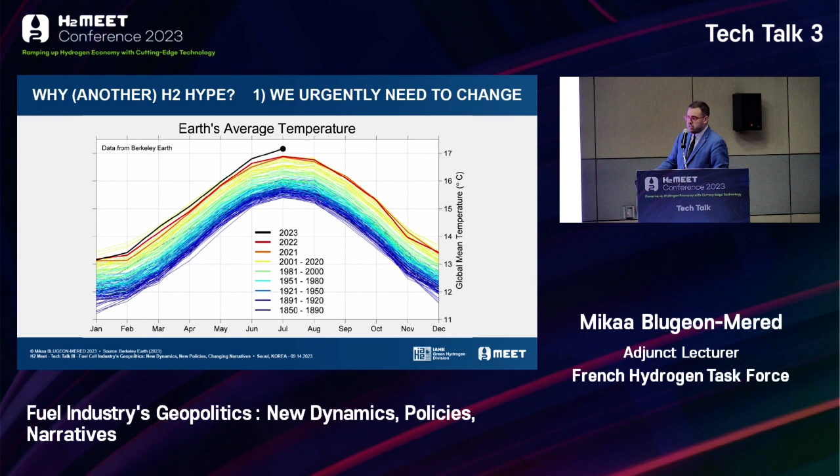To get there, the window is basically shrinking. And when I say the window is shrinking, that should push policy makers and the other people I mentioned to invest even more in hydrogen, fuel cells, and so on.

But of course, it's more complicated than that. First of all, the numbers are so huge that some people will see this as a massive historical business opportunity, while others will experience a disconnect between the reality and those numbers. The sheer size of those numbers creates a sense of defeat before even trying to understand them better - it's too hard, too complicated, the mountain is too high, we'll never get there.

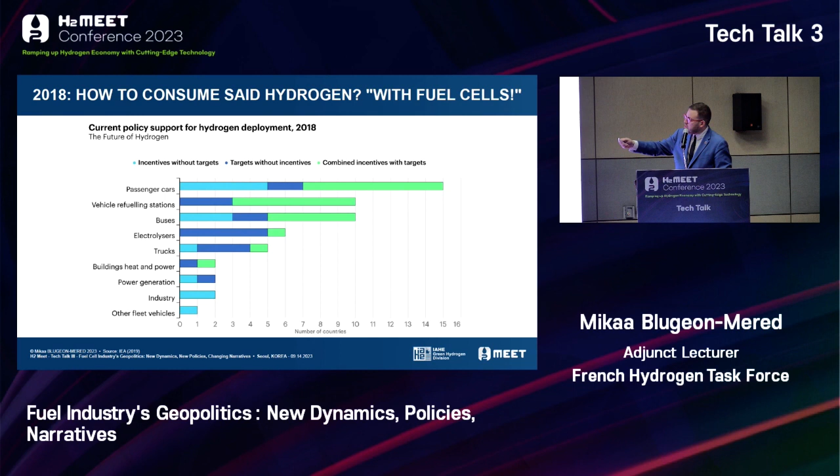Let's focus all our efforts on passenger cars, refueling stations, and buses with fuel cells. Because in the general media, with politicians and administrations, fuel cells seemed easy, right? You just take some hydrogen, take some oxygen, mix the two together, and boom — you get water and electricity, and voila, magic. Of course, you don't have to go further to develop a powerful message for the general public. It doesn't have to be deeper than that.

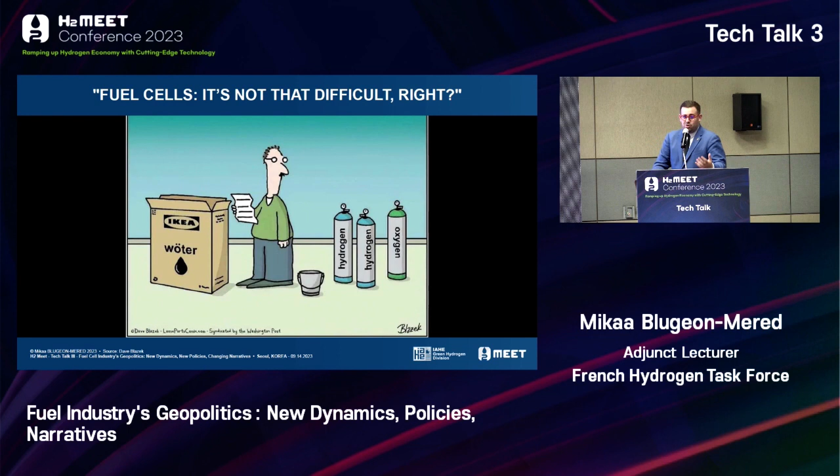Only, well, it's not that easy. And I'm sure in this room we have many engineers and scientists who know it's not that easy. That is precisely the reason why it was a weird choice — we explain it now in hindsight, right? But at the time, people thought it was good.

People thought hydrogen cars and taxis would convince people — they'd see it doesn't make noise, that it's drivable, etc. Well today, apart from Korea, China, and Japan, there's really no country in the world where fuel cell electric vehicles have taken off. And even in Korea, China, and Japan, I wouldn't say it's really taken off, to be honest. But voila, that's what we've got here.

We've got strategies in most of these countries focusing on a technology that was thought to be easy, but proved more complicated to implement at the scale believed, and that is actually way too small to kickstart an industry. The demand for hydrogen for transport applications in 2021 was merely 0.03% of global hydrogen demand. So you will never kickstart an industry, and more importantly, not in the context of urgent climate urgency, with that kind of thing.

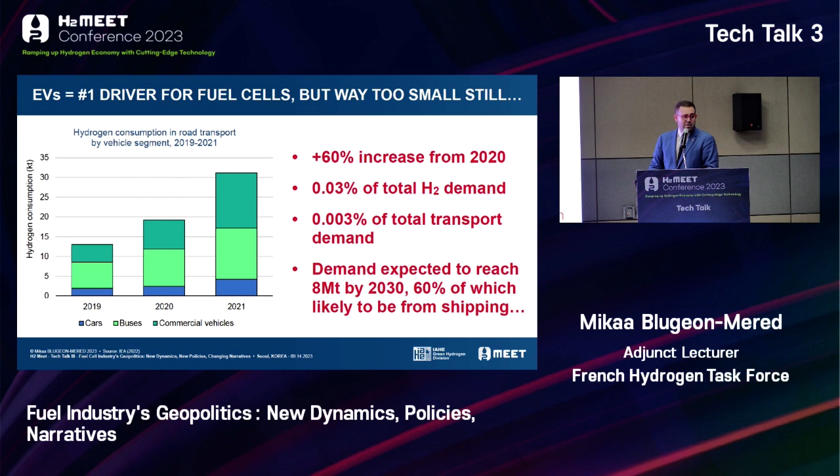But that's the thing, at the end of the day, we're now in 2023, and in hindsight, there was too little distribution infrastructure, too little adoption, too much complications, and so on. Now the narratives around fuel cells are changing even faster. What is happening in fuel cells?

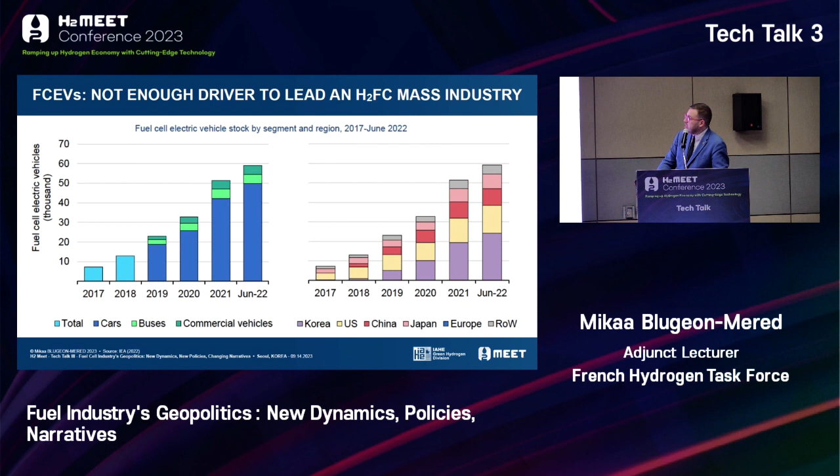Okay, but once again, it's too little. And not only is it too little, but there's one big actor that managed in just a matter of a few years to actually clinch the majority of the market. That huge actor that only the US can certainly compete with is, of course, China.

So if you ask any European car maker, any European car market analyst, they will tell you, well, fuel cells might actually be a bad idea, not just because it's ineffective in getting that hydrogen industry rolling, but because building fuel cells in a car is actually quite close to building an electric battery car.

Who's leading in battery electric vehicles today? China. Can Europeans compete with China on battery electric vehicles? The answer is no. That's why in Europe we're taking the hardest protective measures vis-à-vis our own market, to protect our car makers who cannot compete with China on costs and now even on technology.

So then, from a European point of view, and even from an American one as well, what's the natural play once you realize that you can't compete? Well, you're going to change the game, or at least change the rules of the game. That's where you'll get people saying in Europe, in the US, in Canada, well, we're going to have battery electric vehicles. That's a given. This ship has sailed.

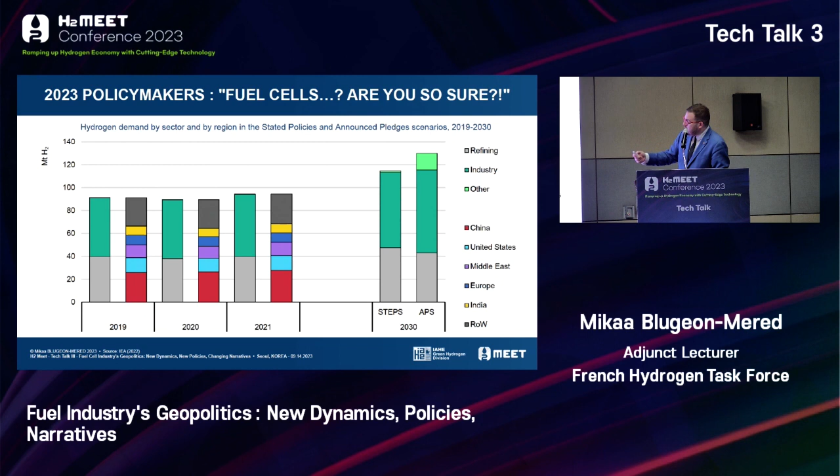And that's how we now have a lot of debate in Europe about the fact that we should ditch fuel cells and actually promote internal combustion engines running on hydrogen. This narrative has changed. The switch happened in the past year and a half, and it happened very fast.

And in Europe, it was even exacerbated when the European Parliament this year, in 2023, decided to ban the sale of thermal cars in 2035. Car makers in Europe were like, okay, so we have green parties coalescing all across Europe, so that in the European Parliament they passed this ban on selling new thermal cars by 2035.

What's the alternative? Batteries, we're screwed. FCEVs, we're about to be screwed. What's left? Oh, ICEs. But ICEs, that's a thermal car. Yeah, it's a thermal car, but it's not running on fossil fuels. So maybe that's fine. Actually, that's the only loophole in the law.

So definitely, this is just an example in the passenger car, lightweight vehicle space. But then, of course, this message saying that fuel cells might not be the way, might be too complicated, might actually be a strategic vulnerability for Europe and the US, has spread to other parts of the hydrogen industry and these industries that could be abated with hydrogen. And when you look at the 5 main types of usage for hydrogen in a Paris Agreement context, what you realize is that actually fuel cells are not needed in most cases.

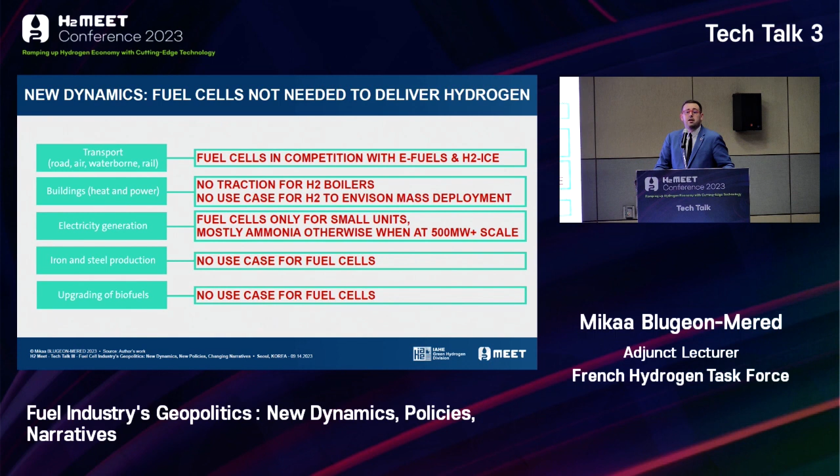So that once again pushes the narrative that we should ditch the fuel cell strategy and focus on co-firing, ammonia, internal combustion engines, and so on. This is purely political, and I would dare say geopolitical. Refineries, fertilizers, steel making - we don't need fuel cells.

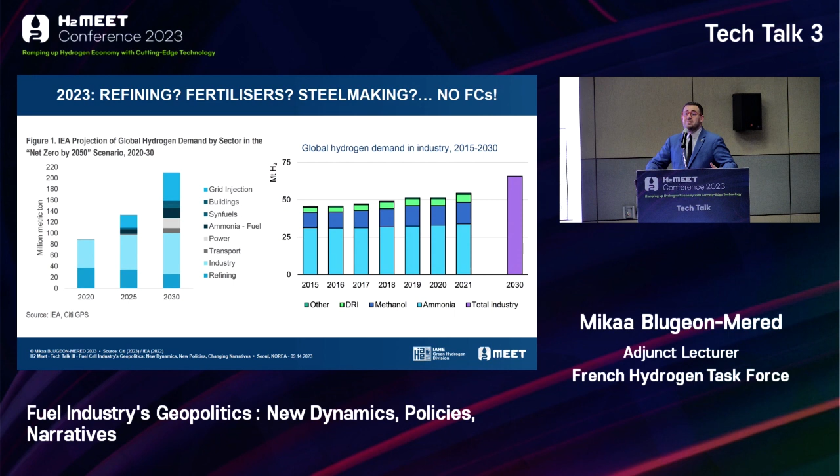So if that's what Sweden is focusing on, the Netherlands is focusing on, Germany is focusing on, France, Spain, etc., then basically fuel cells, okay, they're there, but we're not going to use them that much. So we can't build our new 2023, 2024, 2025 updated hydrogen strategies on fuel cells. We can't do that anymore.

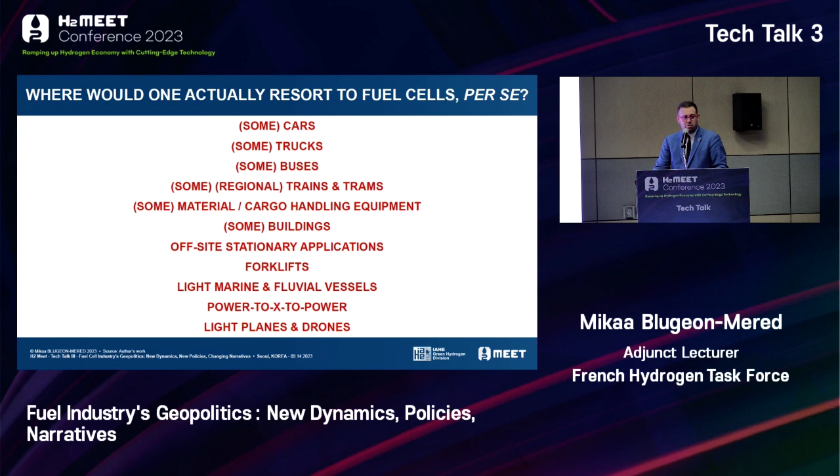But now, my main message and my main question for you guys, everyone here in this room, ladies and gentlemen, is when you think about hydrogen, and when you think about the change that we need to deliver by 2050, which is in less than 10,000 days, should we have a global effort at the macro level on what matters the most? Or should we just think about business? Thank you so much for listening to me.

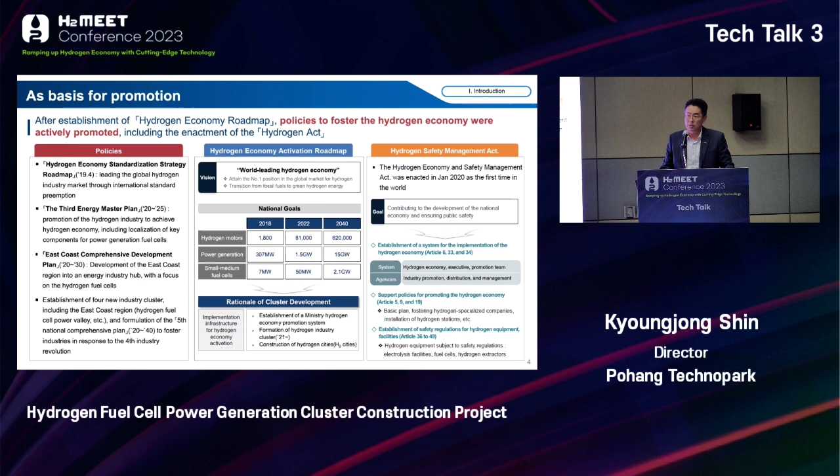2040년까지 수소차 620만 대 보급, 발전용 연료전지 15기가와트, 가정 건물용 2.1기가와트 보급이라는 아주 적극적인 목표를 가지고 현재 추진 중에 있습니다. 그리고 이런 정책을 뒷받침하고자 수소경제 이행을 효과적이고 지속적으로 추진하기 위해 2020년에는 세계 최초로 수소경제 육성 및 수소 안전 관리에 관한 법률, 즉 우리가 쉽게 말씀드리는 수소법이 제정이 되었습니다.

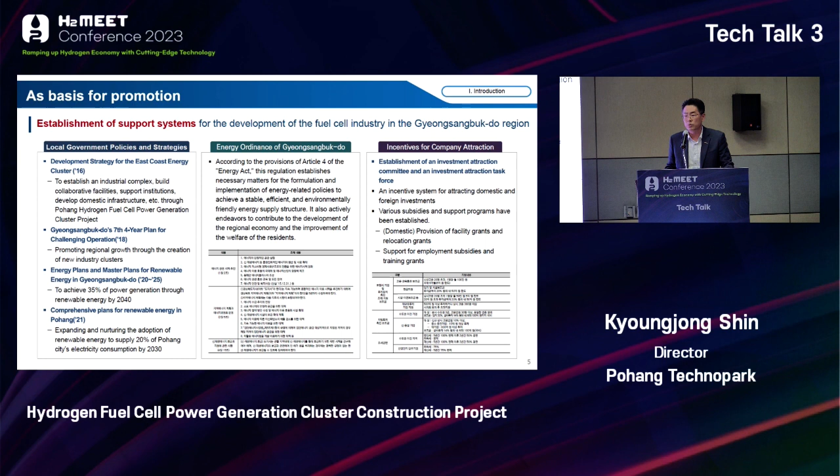여기에 발맞춰서 지방 정부들도 여러 가지 정책과 조례를 지금 제정하고 있습니다. 특히 경상북도와 포항시에서는 동해안 에너지 클러스터 조성 실천 전략 수립, 지역 에너지 계획 및 신재생 에너지 마스터 플랜 계획 수립, 포항시 신재생 에너지 종합 계획 수립 등 여러 가지 정책을 지금 수립하고 있습니다. 경상북도와 포항시에는 지방 조례를 제정해서 수소 사업을 추진하는 데 있어서 최대한 지원을 하고 있으며 수소 관련 기업들에게 인센티브를 제공할 수 있는 여러 가지 조례도 현재 만들고 있습니다.

다음은 클러스터 사업의 추진 배경에 대해 말씀드리도록 하겠습니다. 연료전지 산업은 원료와 소재, 부품에서 최종 발전 시스템까지 다단계 밸류체인으로 구성된 기술 집약적인 산업입니다. 이런 연료전지 산업에 있어서 우리나라는 기술은 세계 최고의 수준으로 자부하고 있지만 산업화 기반 시설이 부족해서 연료전지 산업 생태계 육성이 아직 저조한 수준입니다.

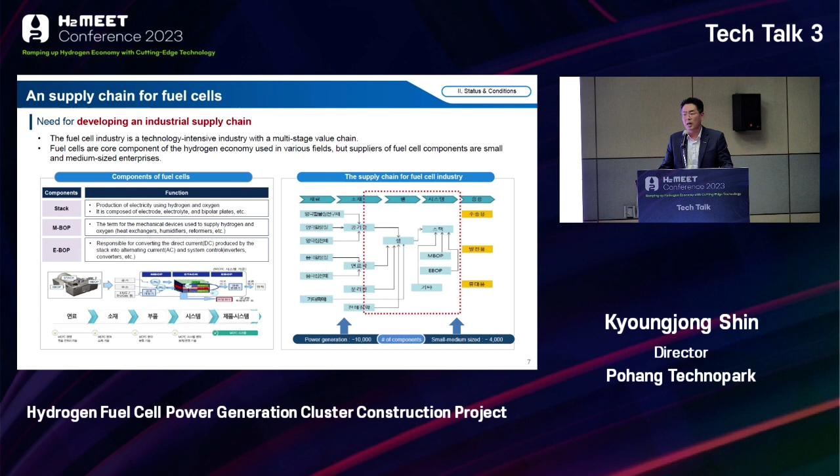우리나라 연료전지 산업은 발전용과 수송용을 중심으로 현재 많이 상용화가 되어 있습니다. 발전용의 경우는 REC 지원으로 인해서 소폭으로 현재 증가세를 이루고 있습니다. 하지만 내부적으로 자세히 들여다보면 스택이나 개질기 같은 핵심 부품들은 아직까지 해외 기술 의존도가 상당히 높은 수준입니다. 그래서 이런 기술의 한계를 극복하고 여러 가지 기술의 국산화를 앞당기기 위해서 저희 사업이 추진되게 되었습니다.

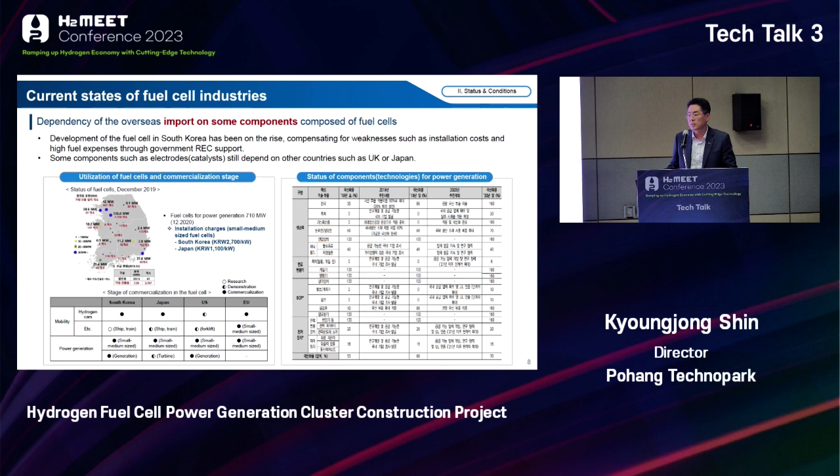그렇다면 왜 이 사업이 포항에서 최적지로 평가를 받아서 추진하게 되었는지 설명드리겠습니다. 포항은 이미 10여 년 전부터 연료전지 테스트베드 구축 사업을 통해서 우리나라 연료전지 산업을 실제로 이끌어 왔습니다. 경상북도에는 연료전지 관련 기업이 약 105개가 위치하고 있고 그 중 55개가 포항시에 현재 위치하고 있습니다. 그리고 저희 테크노파크에 있는 수소연료전지 인증센터와 리스트에는 수소연료전지 관련 장비가 100종 이상이 이미 구축 완료되어 있습니다.

그리고 저희 지역에는 포스텍, 리스트, 포항 테크노파크, 포미아 등 여러 대학과 연구기관에 수소연료전지 관련 연구원 인력이 700명 이상이 현재도 연구를 진행하고 있습니다. 포항시에 지곡밸리라는 곳이 있는데 이곳에는 포스텍과 리스트, 가속기 연구소, IBS, 포미아, 막스플랑크 연구소 등 국내외 연구기관이 집적화되어 있습니다. 그리고 세계 최고 기업인 포스코가 위치하고 있어 수소연료전지 산업 시너지 효과가 상당히 높을 것이라고 평가받고 있습니다.

그러면 수소연료전지 발전 클러스터 사업에 대해서 간단히 설명드리겠습니다. 클러스터는 총 3가지 코어를 중심으로 추진할 계획입니다. 연료전지 관련 기업과 기관이 위치해서 산업 생태계를 구축하는 기업 집적화 코어, 연료전지 핵심 부품과 시스템을 평가하는 장비 20종 26기를 구축하는 부품 소재 성능 평가 코어, 그리고 여기에서 개발된 기술과 제품을 실증할 수 있는 국산화 시범 코어, 이렇게 3가지 코어를 중심으로 추진할 예정입니다.

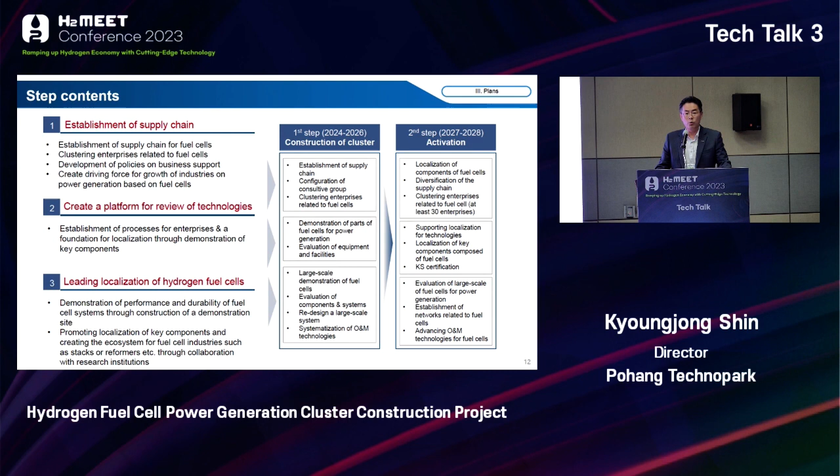클러스터는 수소연료전지 서플라이 체인 구성, 기술 검토, 플랫폼 조성, 수소연료전지 국산화 선도라는 3가지의 큰 목표를 가지고 5년 동안 2단계로 나눠서 추진할 예정입니다. 먼저 1에서 3차년도인 1단계에서는 기업 유치, 평가 장비 구축, 인력 양성을 위한 프로그램 구축을 통해서 클러스터의 기반을 구축하고, 4, 5차년도인 2단계에서는 기업 집적화를 완료하고 기업 지원을 위한 플랫폼을 구축하고 연료전지 O&M 기술을 고도화하기 위해서 클러스터를 활성화할 예정입니다.

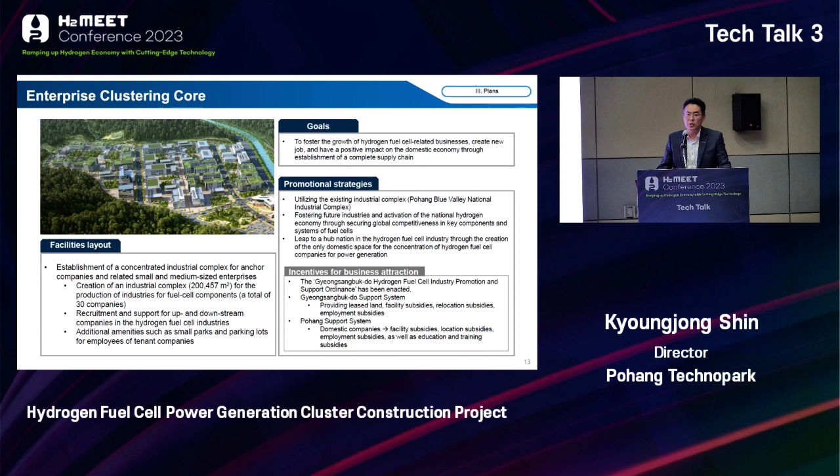세 가지 코어에 대해서 세부적으로 말씀드리겠습니다. 먼저 클러스터 중에서 가장 큰 면적을 차지하고 있는 기업 집적화 코어입니다. 클러스터는 총 28만 제곱미터인데 기업 집적화 코어는 약 20만 제곱미터로 클러스터 중에서 가장 큰 면적을 차지하고 있습니다. 연료전지 관련 기업과 기관이 입주할 수 있는 공간으로 구성할 예정이며, 전기나 가스, 설비 등 시설에 필요한 기반 시설까지 지원할 예정입니다. 그리고 여기에 입주하시는 기업들에게는 경상북도와 포항시에서 제공해 드릴 수 있는 최대한의 인센티브를 제공할 예정입니다.

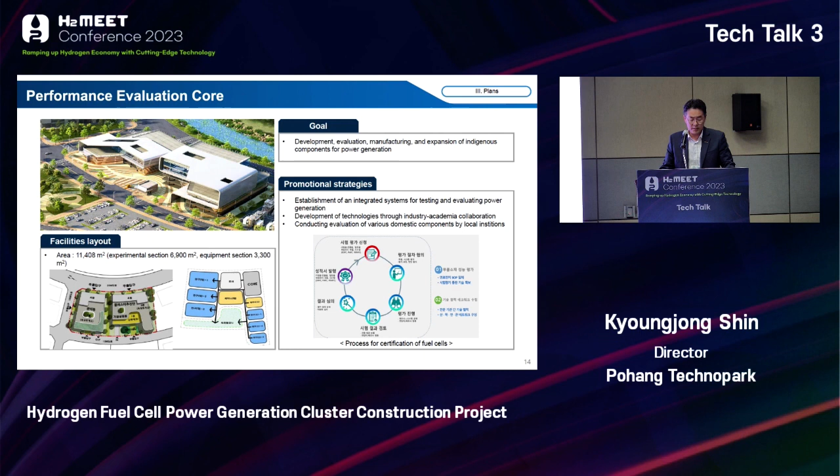그리고 부품과 시스템 모든 분야에서 검인증과 평가를 할 수 있는 장비가 구축되는 부품 소재 성능평가 코어입니다. 여기에는 20종 26개의 장비가 구축될 예정이고 기업들의 연구소를 설립할 수 있는 공간과 창업, 벤처 기업들이 입주할 수 있는 공간도 건립할 예정입니다.

이번 코어에서 구축될 예정된 장비 내역입니다. 100kW까지 검인증 평가가 가능한 PEMFC라든지 SOFC 장비는 이미 저희 테크노파크 인증센터에 구축이 되어 있어 현재 보시는 표에는 그 PEMFC와 SOFC 장비는 보이지 않으실 겁니다. 그리고 대부분 보시면 100kW 이상의 대용량 평가 장비들로 구축을 할 예정입니다. 그런데 한 가지 말씀드리고 싶은 부분은 이 장비들이 아직 확정된 건 아니라는 점입니다. 저희가 앞으로 입주하는 기업이나 기관과 협의를 통해서 변동이 가능하다는 점 말씀드릴 수 있습니다. 저희 클러스터는 기업이 필요한 장비를 구축하고 지원하는 것이 최대의 목적이기 때문에 언제든지 기업과 기관의 의견을 수렴할 예정입니다.

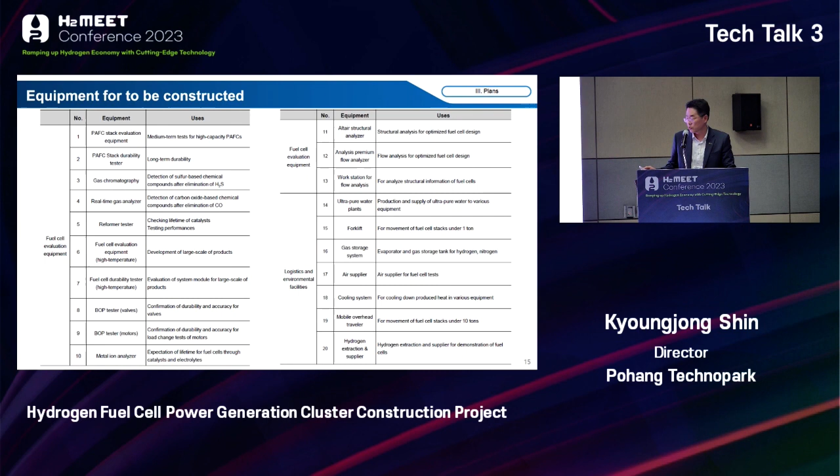다음은 개발된 기술과 제품을 실증할 수 있는 국산화 시범 코어가 되겠습니다. 이번 코어에서는 최대 4MW를 한 번에 운영이 가능할 수 있는 유틸리티를 구축할 예정입니다. 클러스터에 입주한 기업과 장비를 활용해서 개발된 기술을 여기에서 바로 검인증, 실증을 할 수 있도록 지원할 예정입니다. KOLAS나 KS 인증 기관으로 이미 수소연료전지 인증센터가 지정이 되었는데 이 인증센터와 연계해서 기술의 개발, 실증, 검인증까지 한 번에 수행할 수 있는 원스톱 서비스를 구축할 계획입니다.

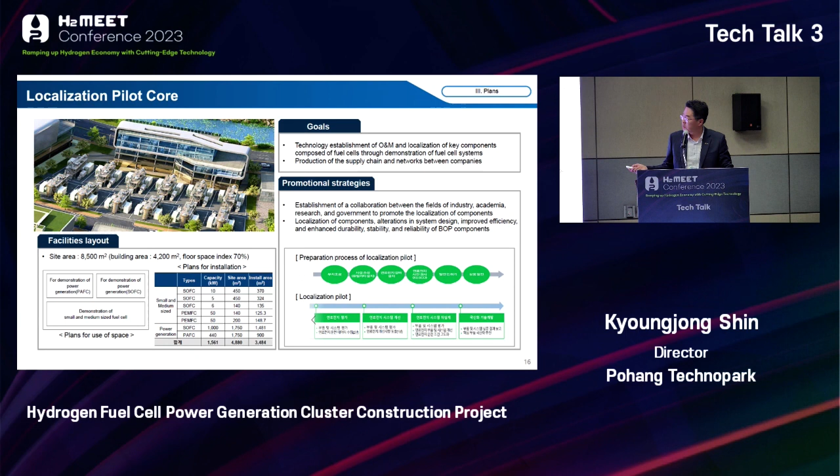그리고 한국수력원자력과 공동으로 수소연료전지 발전소의 O&M 국산화를 위해서 인력 양성과 홍보, 기술 개발을 추진할 예정입니다. 클러스터 소개는 이 정도에서 마무리 짓고 저희가 운영하고 있는 인증센터에 대해서 간단하게 조금 더 설명을 드리도록 하겠습니다.

수소연료전지 인증센터는 저희 포항 테크노파크에 위치하고 있습니다. 포스텍과 포항 테크노파크 포미아가 공동으로 2011년도 수행했던 대경권 연료전지 테스트베드 사업으로 구축된 54종의 장비를 기반으로 해서 2019년 12월에 인증센터가 개소하게 되었습니다.

이 인증센터를 통해서 2020년에는 수소 융복합 인력 양성 사업에 선정이 되어 현재 저희가 석박사급 인력 지원을 하고 있습니다. 그리고 인증센터가 개소가 되면서 저희는 경상북도와 포항시에서 운영비를 매년 6억 원을 지원받아서 현재 운영을 하고 있습니다.

이런 지원을 통해서 2021년에는 KOLAS 공인인증시험기관으로 저희가 지정을 받았고, 지난달 8월에는 KS 인증 위탁기관으로 지정을 받았습니다. 이는 국내에서 두 번째고 경상북도에서는 유일한 인증기관입니다.

그리고 인증센터에는 검인증 기능도 있지만 저희는 실증 지원 기능도 중요하게 생각합니다. FCI라든지 STX E&S의 수소연료전지 제품을 21년부터 현재까지 2년 이상 운영 지원을 통해 실증 데이터를 확보하고 있고, 다음 달부터는 45kW SOFC 시스템이라든지 일체형 수소 생산 시스템 실증 운영에 들어갈 예정입니다.

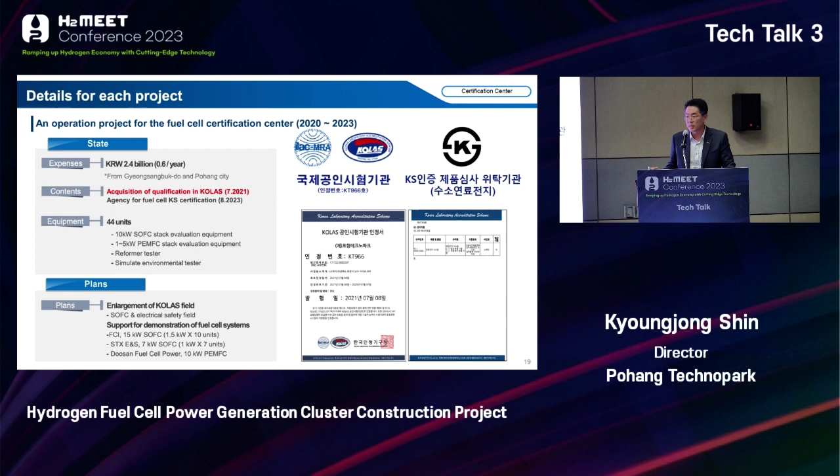21년부터 올해까지 3년 동안 국비 80억 원을 포함해서 총 100억 원을 투입해서 인증센터 장비를 고도화 중에 있습니다. 이번 사업을 통해 SOFC 1kW, 10kW, 25kW 평가 장비와 PEMFC 100kW 평가 장비, 대용량 EBOP 평가 장비 등 총 32종의 장비를 추가로 구축했습니다.

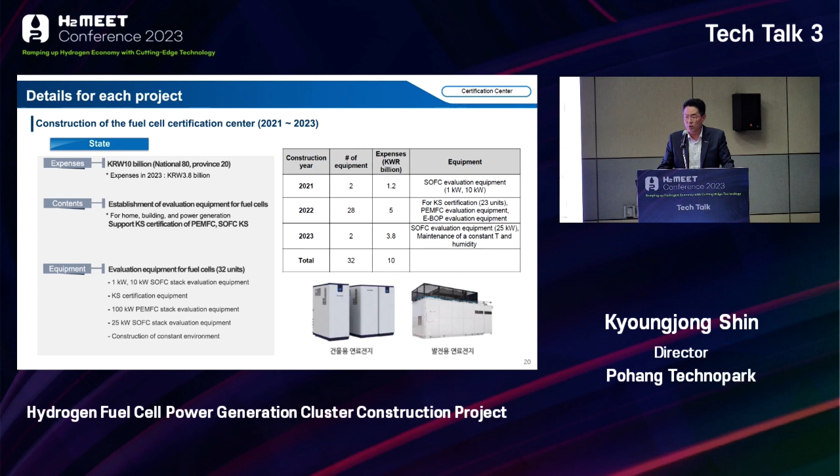구축이 완료되는 올해 말에는 국내 최대의 장비가 구축된 인증센터가 될 것입니다. 현재 스택 평가, 개질기 평가, BOP 평가, 모의 환경 시험 등 총 44종의 최신 장비가 구축되어 있으니 관심 있는 기업이나 기관에서는 언제든지 이 장비를 활용해 주시기 바랍니다. 이상 발표를 마치겠습니다.

You can see downstairs the practical application which I will show you is for a truck, which is running on the roads. The truck itself is driven by a fuel cell. You can see a lot of information here on this exhibition about this. We have some confidential agreement, that's why I have to use my own computer, and I'm still trying to get it running.

The fuel cell itself consists of a fuel cell stack. The stack itself consists of a bipolar plate, which is welded together as an anode and cathode. And then at the end of the day, you have the bipolar plate itself. This is a chart where you see the complete manufacturing process, starting from the raw material, which normally comes from a coil, then the forming operations, then the washing, then the welding, then we have the leakage test. In our case, we are using a post-coating process. And then we have the assembly coming to the stack itself, and then at the end of the day, the fuel cell.

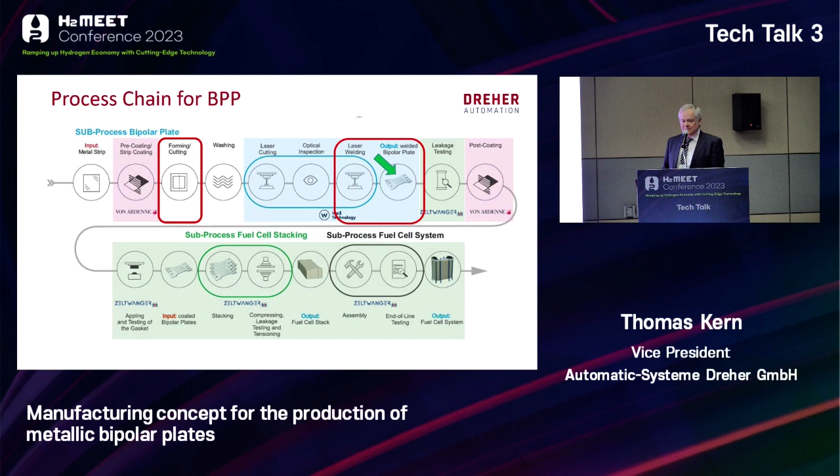What I want to concentrate on, and I did not see anybody showing something like this at this event, is the production of these bipolar plates. We are a medium-sized company, and we work together with other companies specialized in manufacturing each individual process. There are companies like von Ardenne, they are for the coating. There is the company Weil Technology, they are involved in the welding, and then the company Zeltwanger, they take care of the assembly of the fuel cell itself.

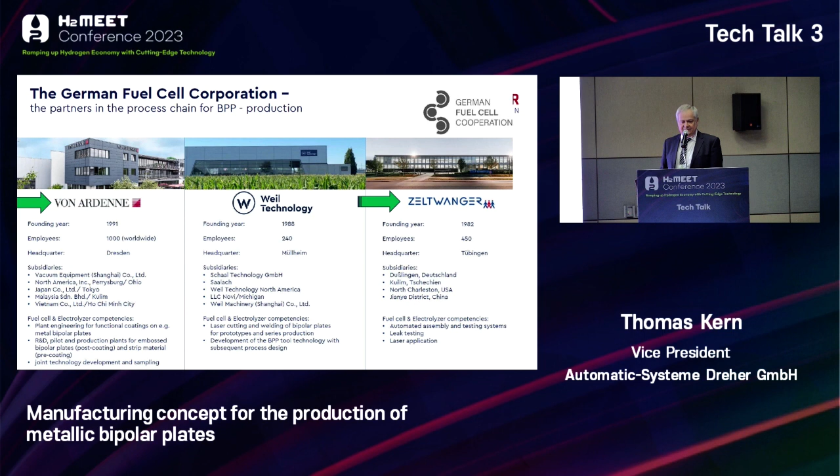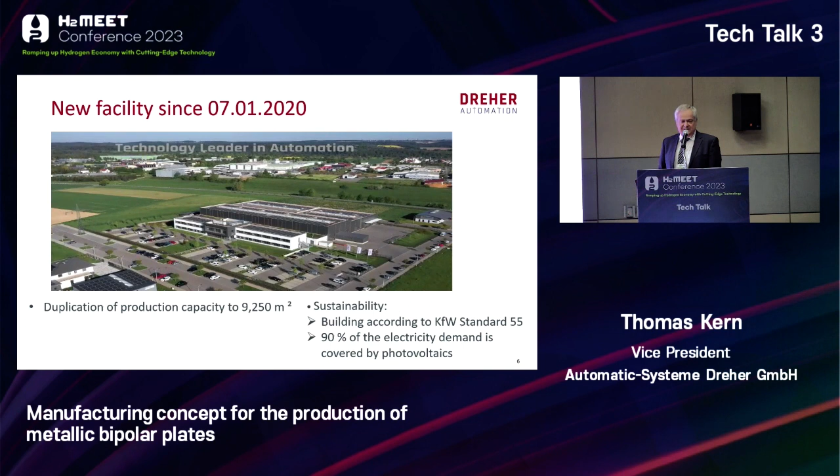We as Dreher, just a very short update about who we are: it's a 50-year-old company. We just moved 3 years ago, when Corona started, into a new facility. We have about 200 employees in our company taking care of everything related to automation in press shops.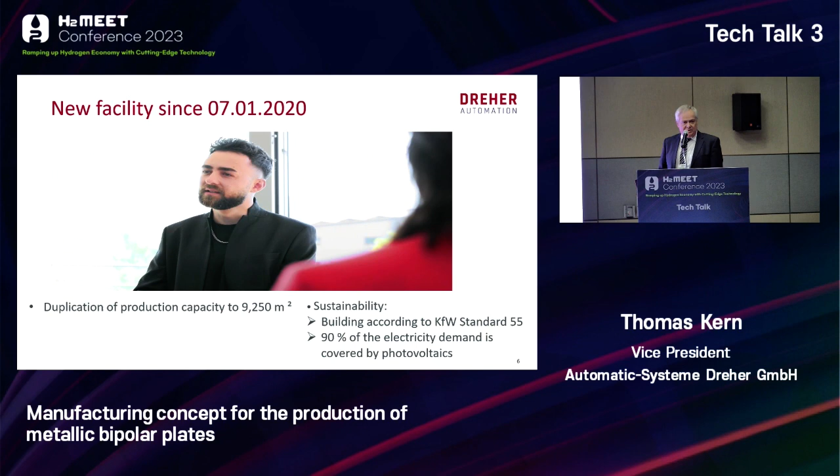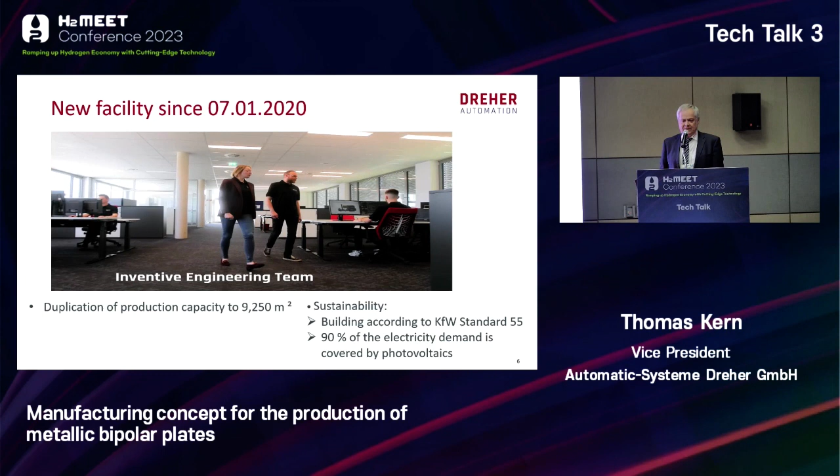I think what's important is that the facility has been built with sustainability in mind. Our building has been made under the latest regulations, and as you can see, we produce almost 90% of the electricity which we need to manufacture our machines by ourselves.

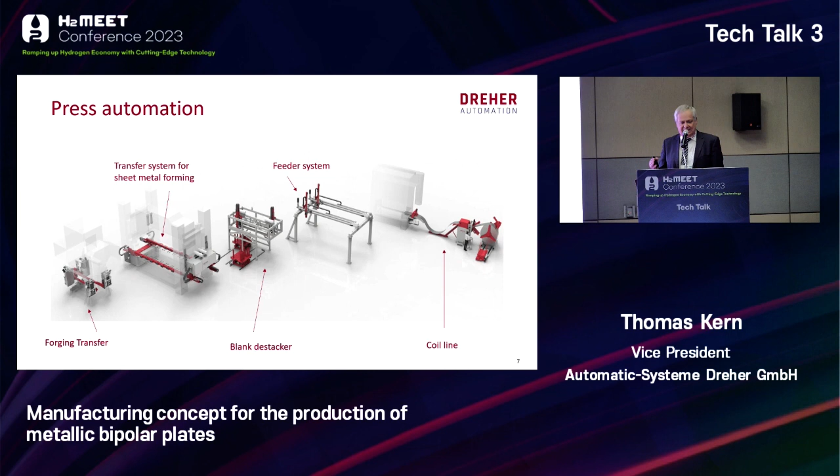In principle, what we do by ourselves is manufacture all equipment which is around the press, meaning everything in front of the press, inside the press, and behind the press. These can be coil lines, destackers, transfer systems, feeders, and stacking devices. What we don't build is the press itself.

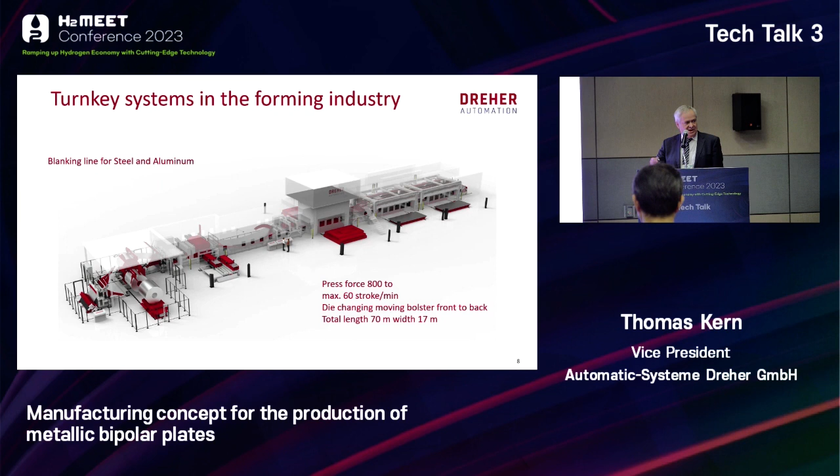Being in this business for more than 50 years, we do not only supply single equipment, we became more and more a turnkey supplier. We buy presses and integrate them into a complete system. That's an example of a blanking line to cut blanks for a press shop, for a big OEM in Germany. The pictures are not only drawings, it's also in reality. The line has been in production for 2 years and was built under all the bad circumstances during the Corona period.

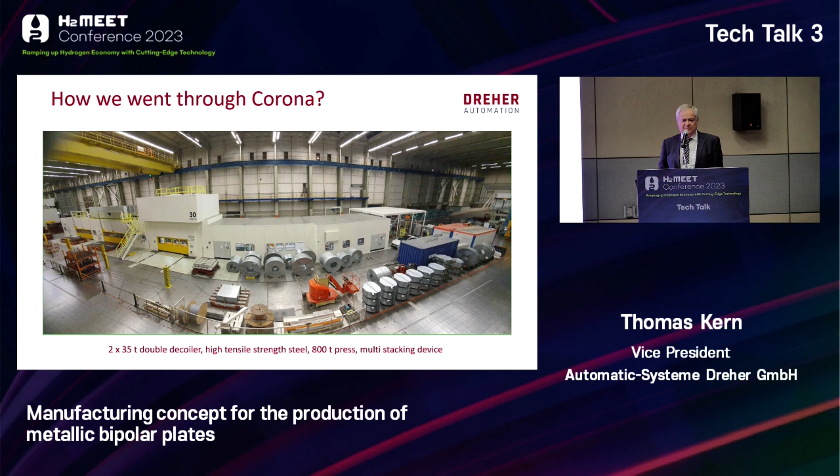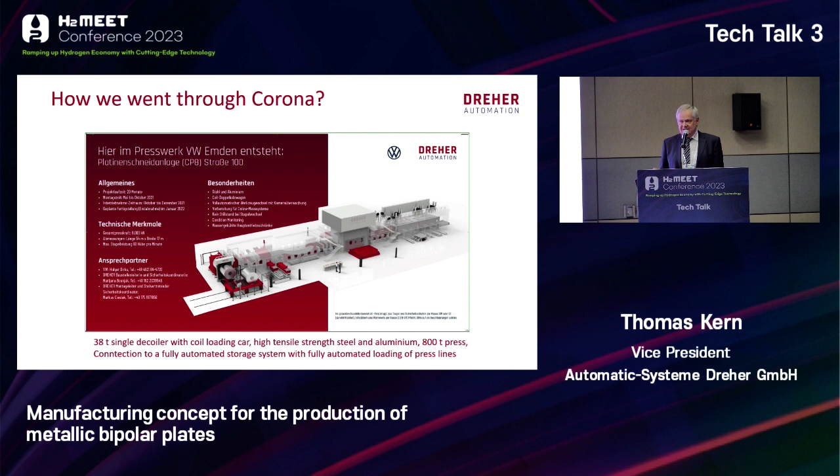Those lines are used in the press shop to make blanks, which will be formed afterwards into components of cars. In principle, our business is related about 80% to the automotive industry, and this of course for steel and aluminum.

Coming to the more important topic, having this experience not only as an automation supplier, it became deeper into complete forming systems, including not only the equipment but also the development of components which have to be formed afterwards. We work together with die manufacturers supporting us in the manufacturing. What I would like to show you is the manufacturing process of a bipolar plate which is used right now for a truck.

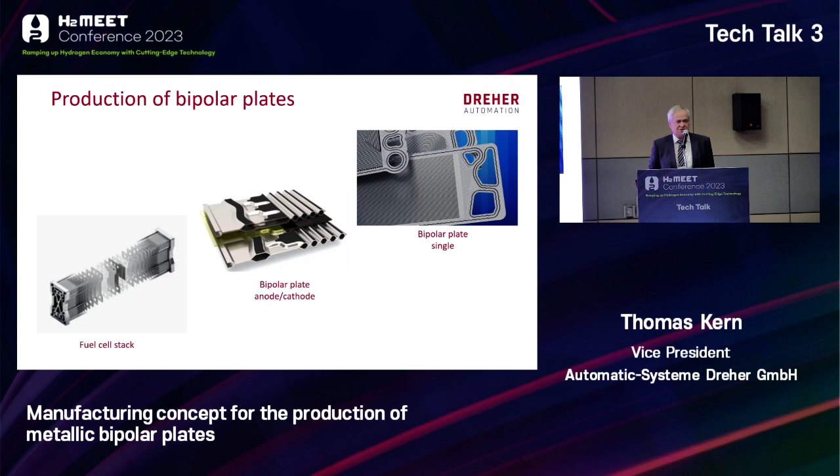The challenge for us - I'm not sure who here is from the forming industry - but what I usually say is a lot of geniuses have good ideas and develop something new, but somebody at the end of the day has to manufacture it and find a way to make it happen. For us, there is one important number.

The bipolar plates are made out of stainless steel. That's not the challenge. The challenge is this number: the thickness of the blanks we are running in full production right now is 75 microns - similar to a sheet of paper. The challenge for us was how to feed material like this into a die, how to form it, what kind of force you need, and how to handle the whole equipment without damaging anything.

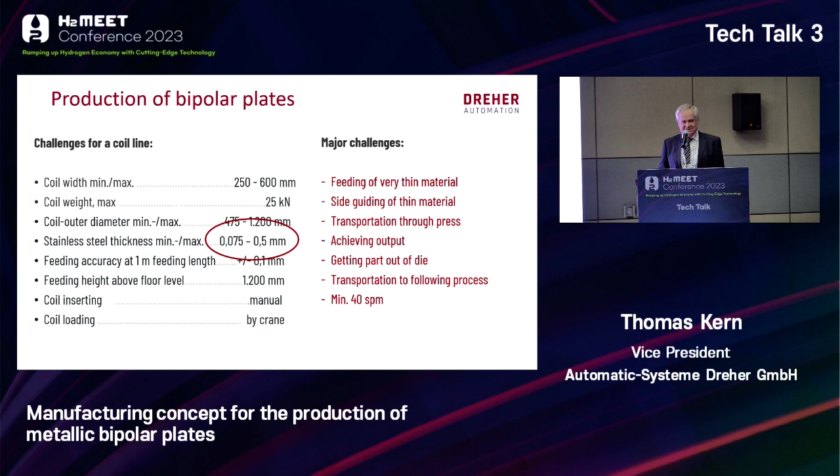Maybe to your surprise, what I will give you now into your hand are the real parts. I think it's always better to feel it a little bit, because then maybe you understand how complicated it is to handle a part like this. I will pass it through, you can touch it, but I need to get it back afterwards. Please be careful, because the edges are very sharp and it is very easy to cut your hands. If somebody hurts himself, I'm afraid that's your task to deal with.

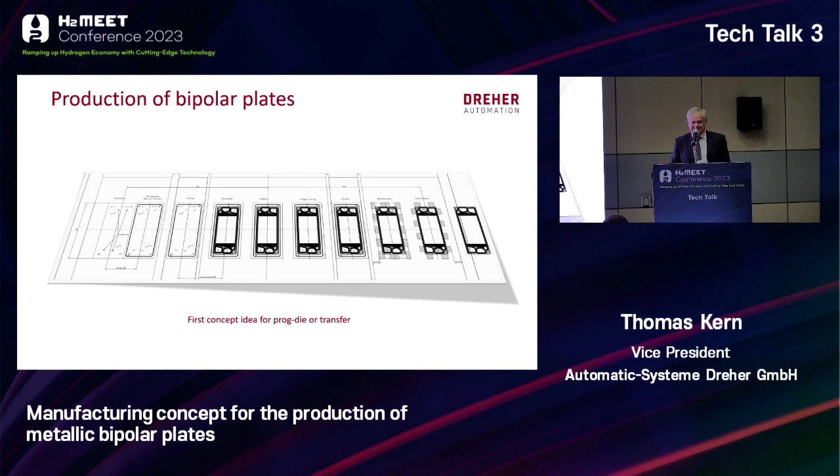Nobody had any idea how this material would work and how we could work with it. That's why we used at one of our customers a very old machine which was not designed for this—a hydraulic press, a 1,600 ton press, absolutely not designed for this. We had to find a solution to make the first tests.

We developed for this process a die-mounted transfer system just to get the feeling of how we can handle the material. What I'll show you now is after 2 years of learning and understanding how to feed the material, and the machine is still in use for pilot productions. Push the left picture and hopefully the video will start.

Okay? So you see, this is real production. Yeah, no more theory, real production.

On the left side, we feed the material. Then on the front side, you see our gripper system. What was interesting for us was first to understand how we can feed the material. It took quite some time to develop each component because the material is really sensitive. To understand how sensitive—take 2 meters of paper, try to feed it, try to push it, and then you'll understand it's not just using a feeder and pushing it somewhere.

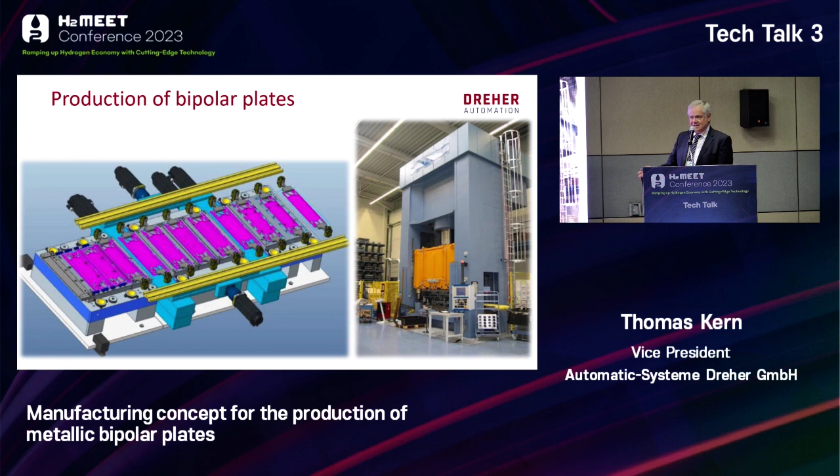This was also a big challenge because using vacuum units, the stroke of the machine would be too big, so it would not be possible to achieve the required cycle time. Using grippers is also not possible because in this case we would damage the flow field and the parts itself. So this is what you've seen before—the line for tryout and development.

This is now a picture of the final line, which is in full production. It consists of a coil line, so we run from the coil. Since the surface of the material is very sensitive, we use a brushing unit to clean the surface. We have a roller feeder, which is quite special, and a lubrication unit because for forming the flow field we need lubricant. Then we have a thin coil material guiding system, which is quite special. We use a transfer, and at the end of the line a conveyor system, which I'll show you afterwards. We use a monster of a press because we're running those parts you have in your hand with a capacity of 1,280 tons just to form these parts.

So you'll see some of the components in reality. On the left is the decoiler, the brushing unit, the roller feeder—and in the roller feeder there are a lot of technical details I could explain all day, but it's not just a standard roller feeder. There we have to be careful that there's no dust or hair on the rolls, because this would damage the flow field immediately.

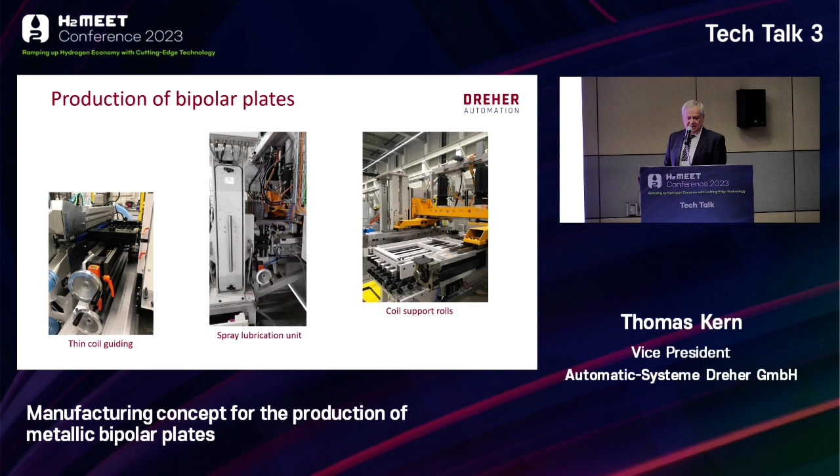So you see the guiding, the lubrication, and then the support rolls, but I think you see them better on this picture on the left side. Normally when you feed material, it's good enough to have some rolls from time to time, but due to the very thin material, we had to find a way to have the material supported by one of these rolls every time. These are very light moving rolls, and there we have an agreement with one of our suppliers.

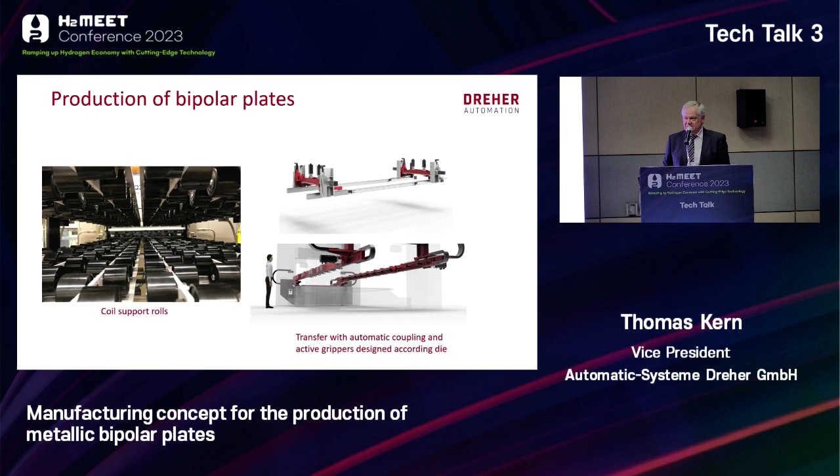For normal rolls, the resistance would be too big, which would cause wrinkles already. So this was interesting to realize, because we thought taking some support rolls would be easy, but it took a couple of weeks to find the right solution.

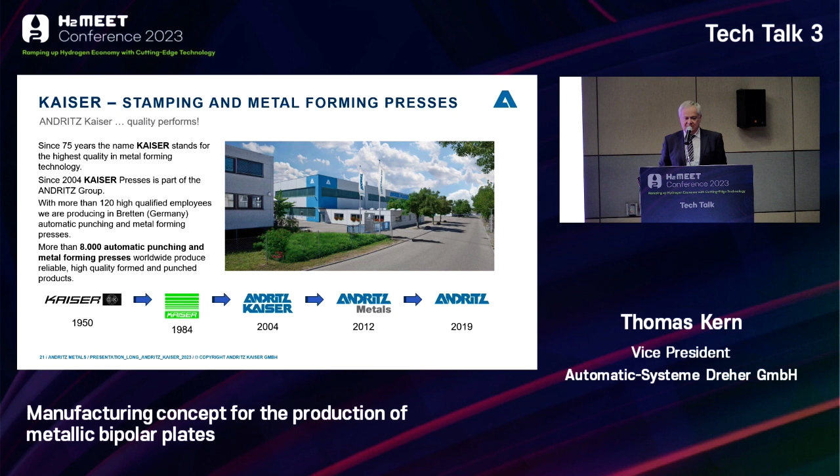Coming to the press, because the press is also a very important part of this. The press is built by the company Andritz Kaiser, which is a very big organization. Kaiser itself is a German company, located in Germany, a company with a similar size to what we have. They belong to Andritz since 2004, so quite a big organization. The specialty of Kaiser is in special presses, which are very strong and very rigid.

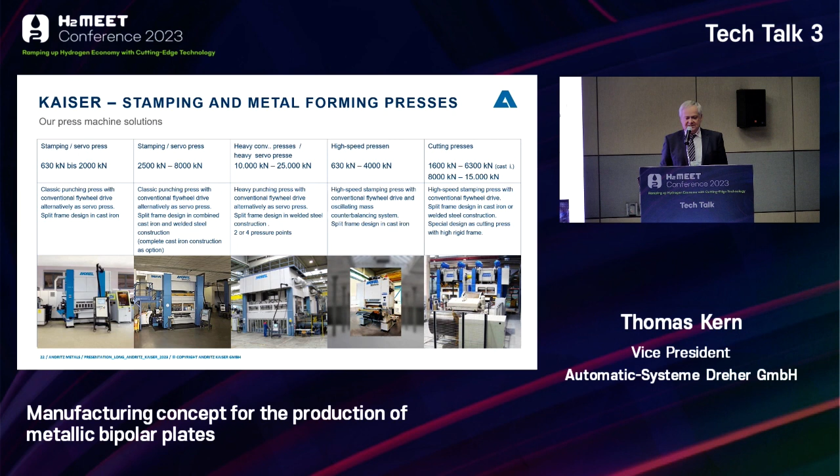I see that time is running, so I will skip some of these charts. What is important to understand is the dimension of the product at the end is 400 by 140 millimeter. The material itself, in Europe, it's called 1.4404. I understand in Korea it's a kind of 3 series, and the thickness is 0.075 millimeter. The 4 main operations you have seen in front of you, and what might also be interesting is to produce the flow field, which was required by the customer. We need about 2.5 tons per square centimeter to form it.

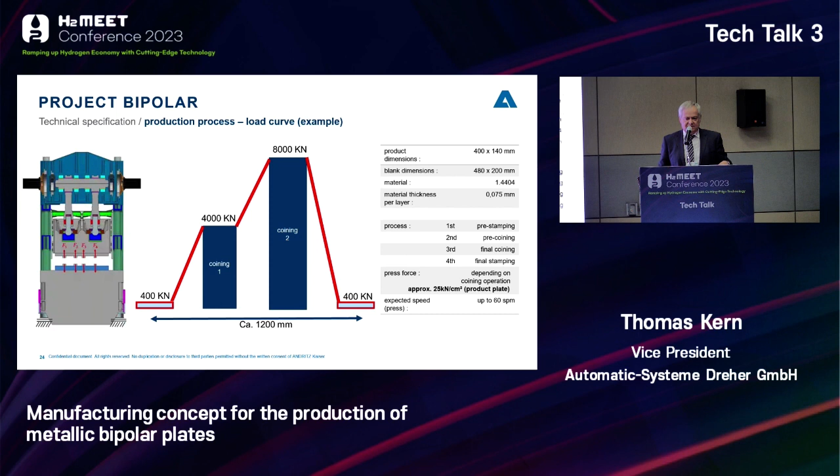So what was the challenge for the press? You see this is the distribution of the forces - very low force for cutting, quite a big force for the pre-embossing and the final embossing. Then, of course, we need these 800 tons, and the cutting at the end of the day is also quite a small force. The challenge for such a press is that with the normal force distribution, there is a very big off-center, which causes imparallelism of the machine, which has an influence on the forming of the final part.

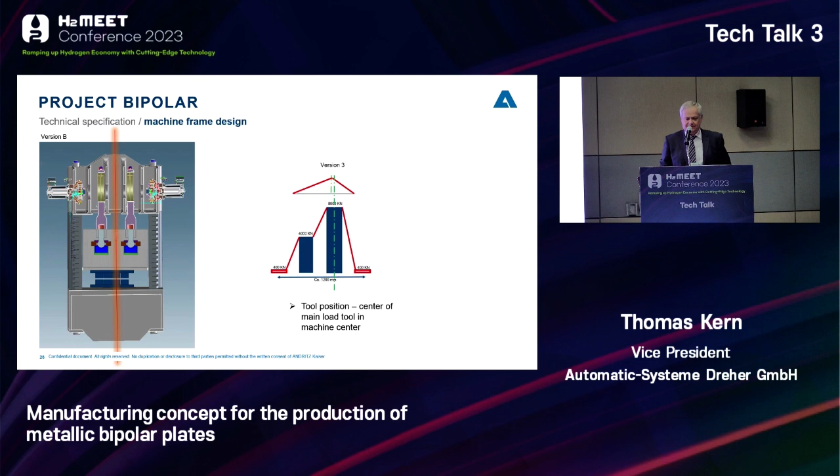That's why we moved the structure of the press. I'll tell you a few words about this, but we also moved the die into a position so that we have the central force in the center of the machine in order to prevent any deflection of the machine. Another topic - normal presses, we try to have our pressure points as far as possible outside the center. In this case, we did it the other way around. We had to put it into the center, because if not, we would create deflections of the components. So we also understood that the stiffness of the machine itself was quite important to realize the accuracies required by our customer.

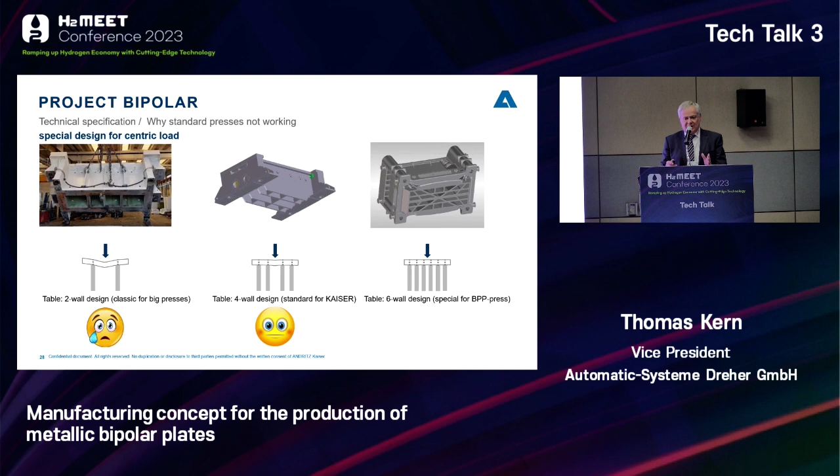Another topic, I call it the monster machine, because on the left side of the picture you see the normal structure of a press - everybody does it this way, with 2 support brackets, but this causes deflection in between, which is not good to produce those parts. The standard design of Kaiser is already a little stronger, with 4 brackets, but we recognized in all the tests we made that it's still not stiff enough. That's why we have a structure of 6 brackets, also in the center of the machine, to prevent any deflection.

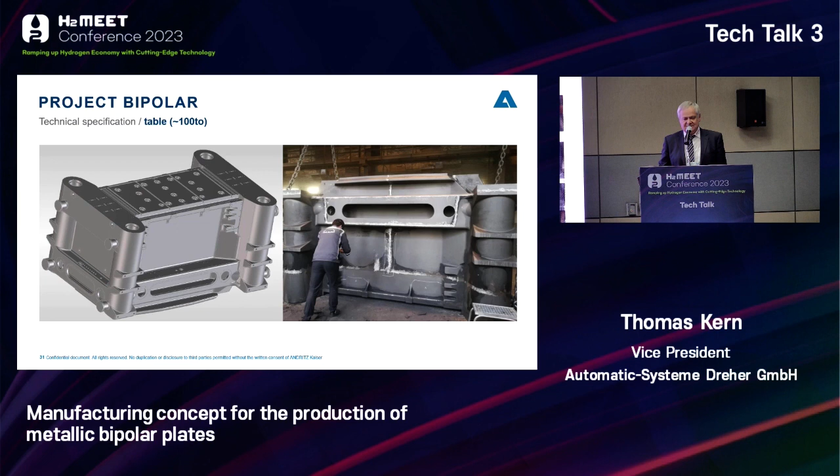I will show you some real pictures of the machine. The machine itself, as I said, is 1,600 tons - quite a huge machine. The weight of the machine is 280 tons, just the weight. You see now some of these components - this is just the press bed. On the left side you see the drawing, on the right side you see the real components. The lower press crown, the upper press crown, and the slide - all these components are casted.

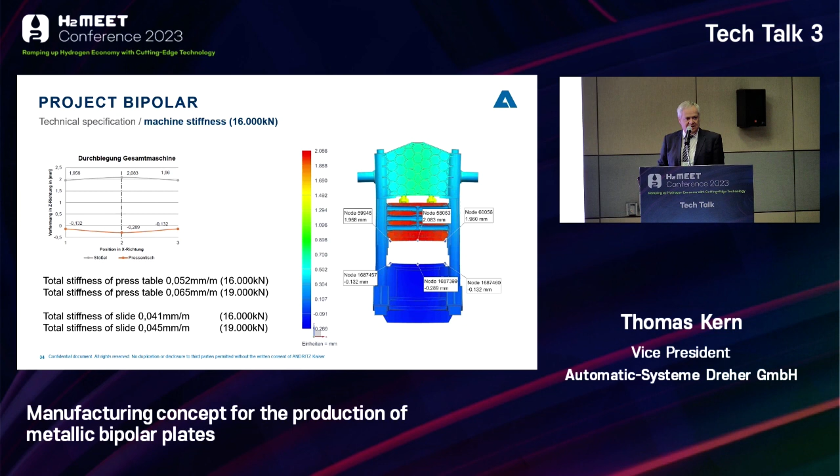I think from the machine building point of view, that's the most important chart. You see we have a stiffness of about 0.05 millimeter per meter at a force of 1,600 tons. This is less than one-third of the deflection of a normal press, and this can only be realized by changing the structure of the machine and using a complete casted frame. Since time is really running, I will still show you some real pictures - this shows the machine during the installation.

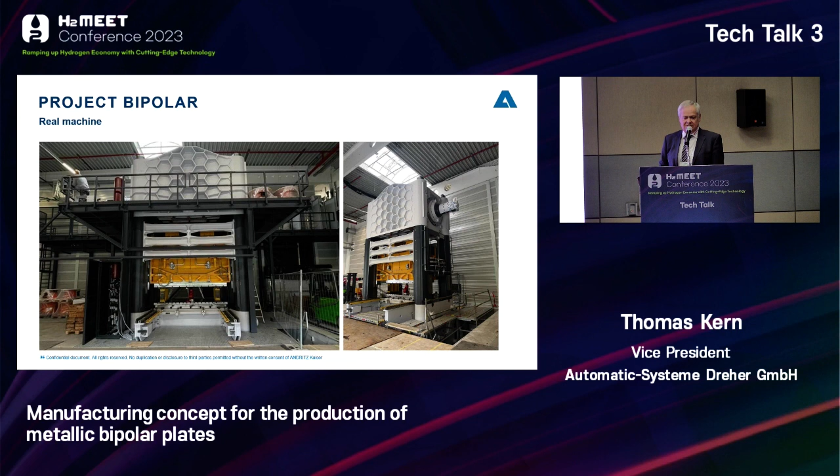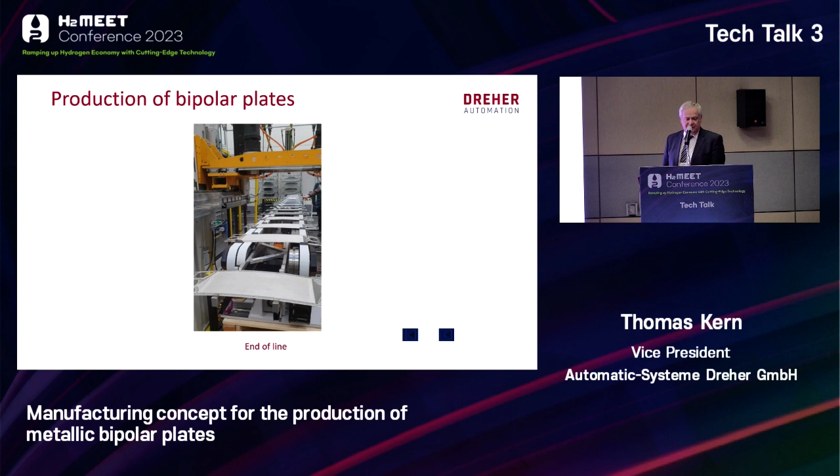I will show you the videos, the first one on the left side. This shows the line in full production, at a speed of 38 strokes per minute, producing bipolar plates. These plates which you have in your hand are produced on this machine. At the end of the line, since we cannot pick up the parts, we have a servo axis which is lifting the parts and taking them out of the press. We put it on a conveyor belt, and from there it goes to a separation station and a stacking station where it goes to the washing machine.

The full production, this was still during the tryout. The full production is running today in 3 shifts on 2 lines, one for anode, one for cathode, in parallel, going then together through the washing machine and then also to the welding machines. The full production right now is stable, running at 40 SPM, and we are trying now to optimize together with the customer to achieve 45 SPM.

So, I think we skip the next one.

What I usually say is, not everybody can make everything by himself. At the end of the day, we only can be successful if we are working together as a team. There is something very important about the meaning of the word team. In German, there is a strange saying: Toll, ein anderer macht's - meaning, great, another one will do it. But Jean Todt, who used to be president of Ferrari, said one day: together, everybody achieves more. I like this meaning, and that's why we created this group, to be able to supply complete fuel cells in this kind of cooperation.

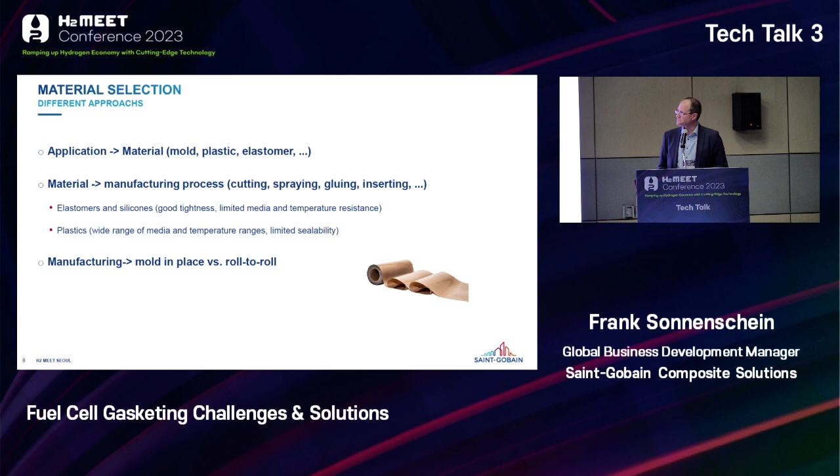And then it's a lot of text again. Please don't read it, I will guide you through it. I found out that depending on which part of the project my customer is in, the solution is different.

If you talk about startup companies, they're there to get subsidy money, to build up something totally new, to start from a blank page, to build the first demonstrator. They talk about 5 pieces, 10 pieces, 7 pieces, 20 pieces. So you have a lot of manual manufacturing, like really a person stacking something. You talk about very small stack sizes, like 3 cells, 5 cells, maybe a 1-cell design, just to demonstrate we can do what we're supposed to do, okay?

And the supplier, that is in that case us, maybe some of you, the demand of your customer is dictating your demand. So I follow my customer. If my customer is changing design often, it doesn't make sense to build a big tool costing several thousand euros, because the moment the tool is made, the design changes a bit.

The bore is a bit left, the bore is a bit bigger or smaller, the diameter is a bit more or less, the radius changed. So I'd have to change the tool again. It doesn't make sense. So the customer dictates, in a way, my approach to making those parts.

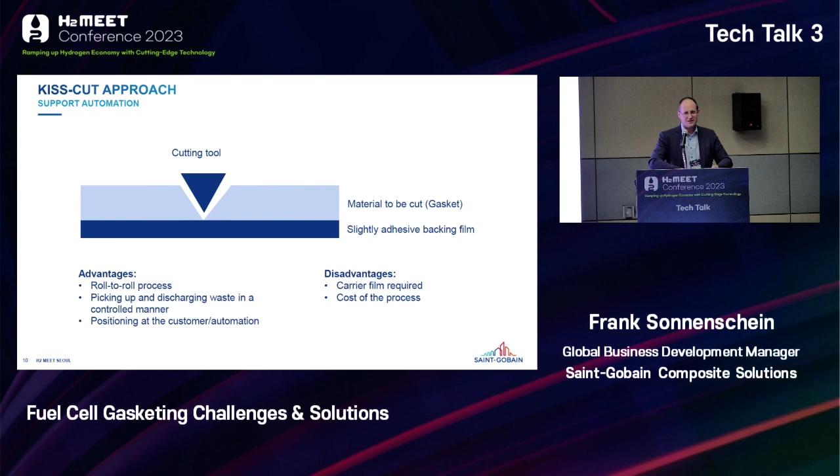So in that case, it would reduce the customer process time. It is a more expensive process because you need the backing film, but the overall cost is significantly reduced because it can speed up the customer's serial production time by 30, 40, 50% and increase their output significantly. It's just one small example of how customer process kind of dictates or leads to supplier process.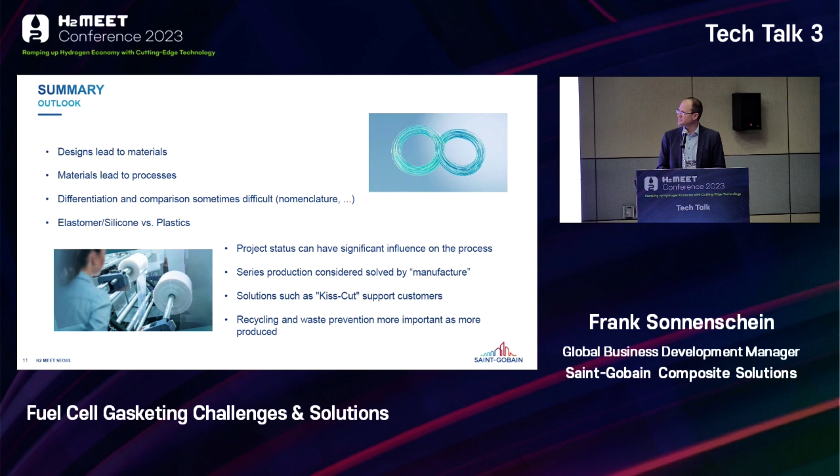That's it. Thank you very much for your presentation. It was so impressive to see how you overcame the challenges and found solutions. Let's see if we have questions from the floor.

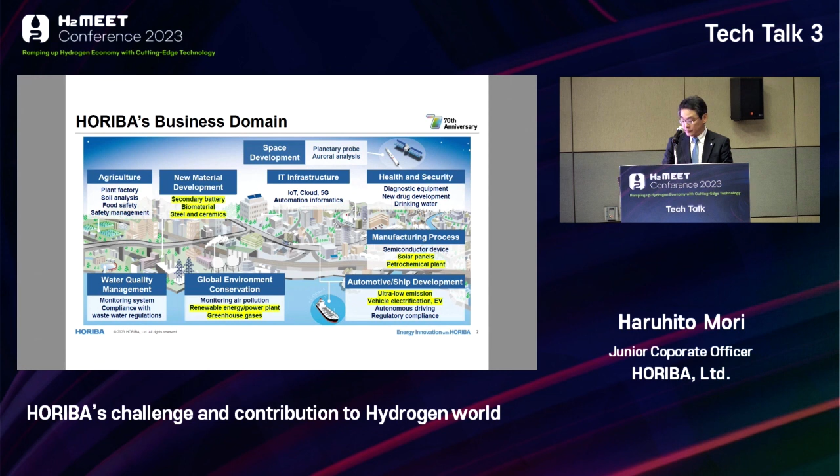One of HORIBA's characteristics is our global network. We have 50 group companies located around the world, and overseas sales account for 73% of our total sales. The HORIBA Group currently has net sales of approximately 270 billion Japanese yen and more than 8.4 thousand employees. In addition, the percentage of non-Japanese employees has risen to 64%, maintaining a well-balanced composition in Japan, Europe, Americas, and Asia, in terms of both business and human resources.

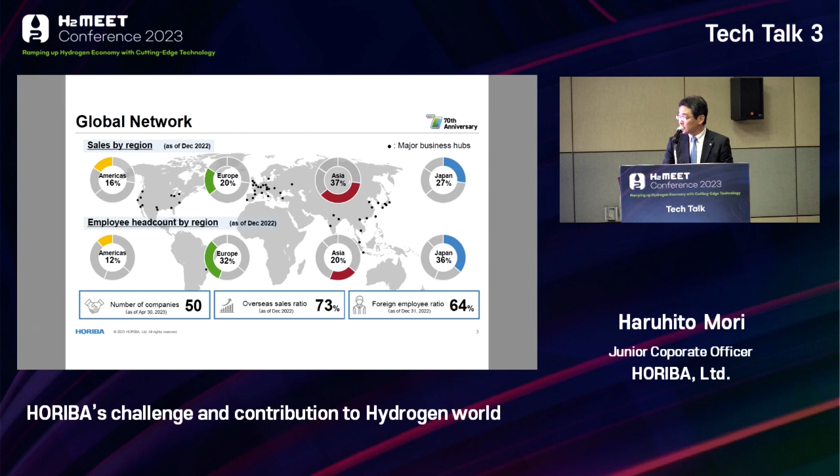As I explained, HORIBA works in major regions of the world, contributing to carbon neutrality, which is accelerating in many regions, starting with Europe, that has invested in renewable energy and hydrogen over the last few years. To achieve carbon neutrality, these 3 steps are important: maximize total energy efficiency, utilize sustainable green energy, and realize carbon capture and circulation. HORIBA will contribute to these activities with our analyzing and measurement technology. This is also our mission to achieve carbon neutrality: the transition from existing fuels such as fossil energy to clean fuels like hydrogen and ammonia, which do not emit CO2.

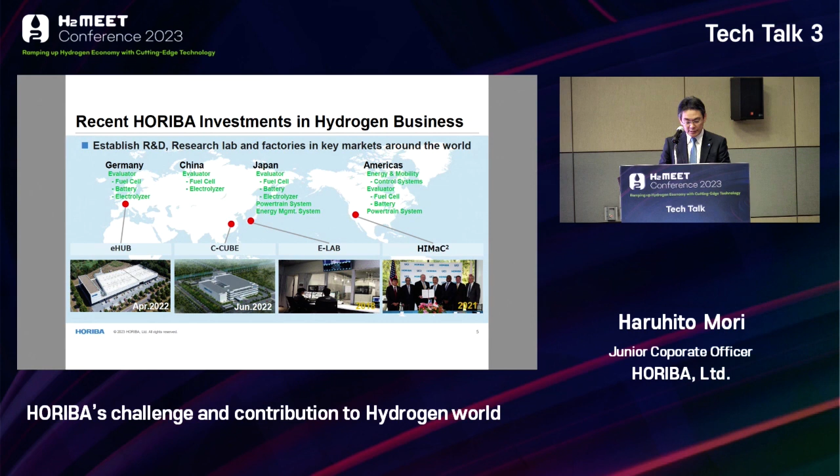Over the past few years, HORIBA has been actively investing in the energy and environment field. We have not only expanded in Japan, but have also proactively established factories and development centers in Germany, China, and the United States. This has positioned us with a big advantage, as it allows us to quickly access global development trends and propose the necessary products at the right time. In the process of production, storage, and consumption of energy, HORIBA offers a range of solutions through efficiency and labor savings of power plants to evaluation and analysis of fuel cells.

Regarding carbon neutrality and hydrogen utilization, I would like to inform two investments, for instance. Left-hand side shows HORIBA eHUB, our new facility in Germany, expected to contribute to future business growth as a global hub base for the HORIBA Group's new energy business. HORIBA acquired Fuelcon, based in northern Germany, in 2018. HORIBA Fuelcon specializes in the development, production, and sales of evaluation equipment for fuel cells, electrolyzers, and batteries. We have delivered numerous test stations to market-leading companies worldwide.

We immediately decided to construct a new factory where we manufacture fuel cell test equipment and water electrolysis cell stack performance evaluation equipment in the year following the acquisition of Fuelcon. This was the best timing, since demand related to hydrogen energy has recently been increasing sharply. We will respond to these demands by strongly enhancing productivity, 3 times the previous factory.

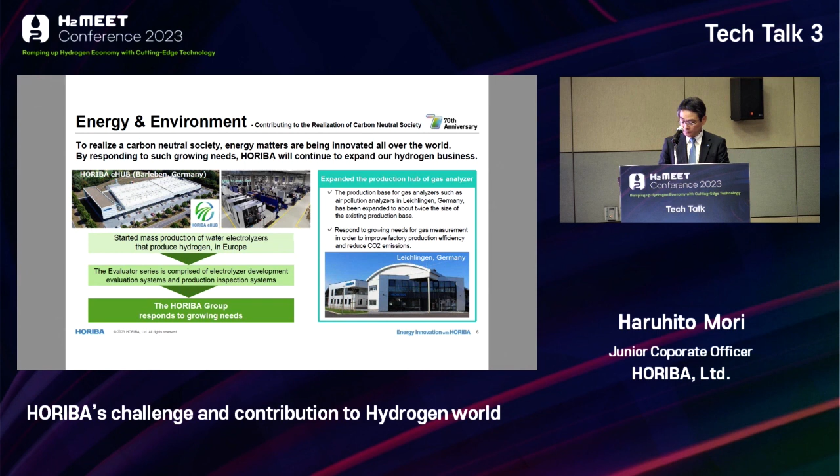This is our lineup of electrochemical evaluation equipment for electric generation by fuel cell and hydrogen production by electrolyzers. In the upper section, we have products used for automotive PEFC, while in the lower section, we cover products used for stationary power generation SOFCs. Our range of evaluation equipment includes MEA, cells, stacks, and systems covering from research and development application to line and quality check of mass production as well.

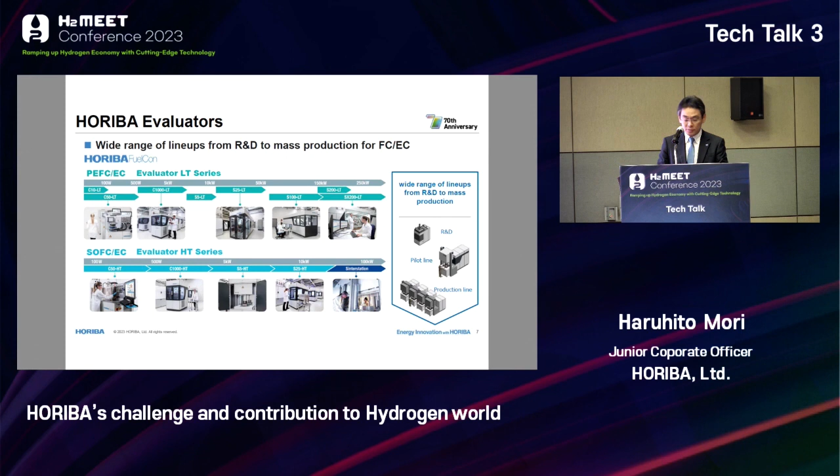To achieve wider adoption in the market of fuel cell vehicles and systems, it's essential to enhance the performance of fuel cell systems while reducing costs. It needs a broad range of evaluations. Furthermore, since the characteristics required by fuel cells vary depending on their applications, it's essential to analyze, measure, and evaluate fuel cells under various conditions. HORIBA provides comprehensive solutions ranging from the analysis of constituent materials and substances to fuel cell system assessments. Through our solutions, we aim to improve the performance, reliability, and durability of fuel cells, contributing to the realization of fuel cell mobility for the broader market, including commercial vehicles like trucks and buses.

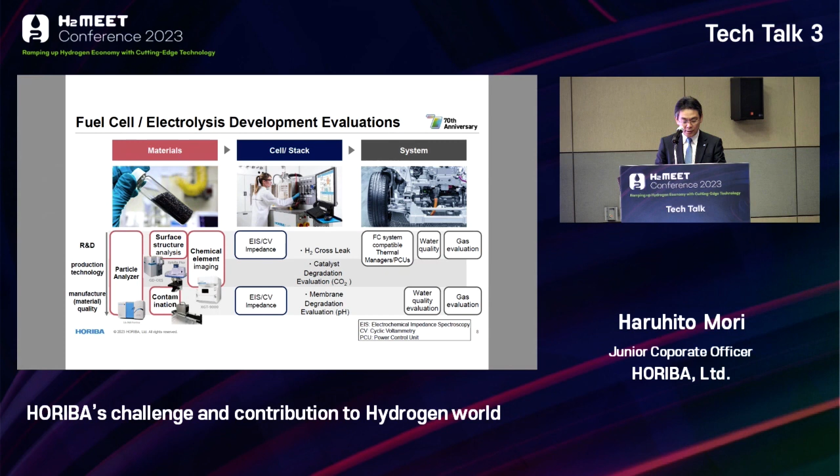This protocol is also applied to electrolyzer testing. As shown on the previous slide, our products contribute from material level R&D to system level validation. On top of that, we can offer testing services, engineering, and consultancy services. By covering all processes consistently, data from the downstream process can be fed back to upstream, making it easier to implement the plan-check-action process cycle through the HORIBA platform.

Recent developments include the European Green Deal Industrial Strategy and the US Inflation Reduction Act. In the past, the aim of hydrogen installation in the energy market was to exchange energy between regions and enable energy circulation. But nowadays, the aim is to establish an intra-region closed circular economy within each respective region by closing the value chain from a political perspective. As a result, we can see competition to dominate the hydrogen business and technology occurring between Europe and the United States, I think.

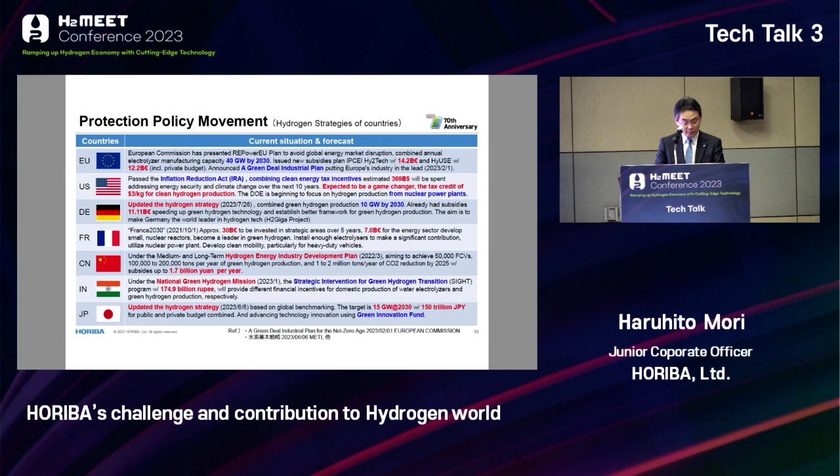The second is to change energy use to carbon-free renewable energy, efficiently converting natural energy such as solar and wind power into secondary energy and using it in the right place without generating losses. Third, if fossil energy must be used, the carbon dioxide emitted should be properly captured and stored or utilized.

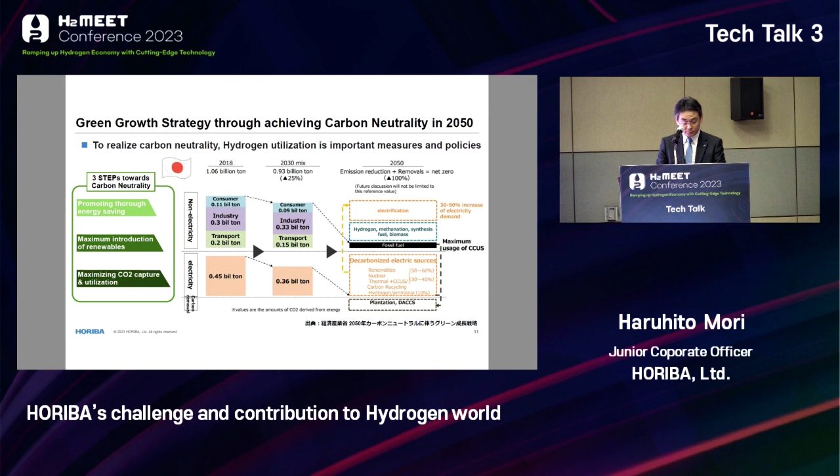I would like to briefly explain Japan's basic hydrogen strategy, which was published by the Agency for Natural Resources and Energy. The original hydrogen strategy was formulated with the aim of effectively developing hydrogen technology and creating a domestic hydrogen market ahead of the rest of the world. Compared to other countries where potential needs for hydrogen are expanding with the introduction of renewable energy, the expansion of the hydrogen market with renewable energy is still unknown in Japan because of the limitation of renewable energy.

Hydrogen investment and tax credits are implemented in various countries. Japan aims to take advantage of its technological strengths to pursue a world where Japan's core hydrogen technologies are utilized in various hydrogen businesses. That's the current situation and my understanding.

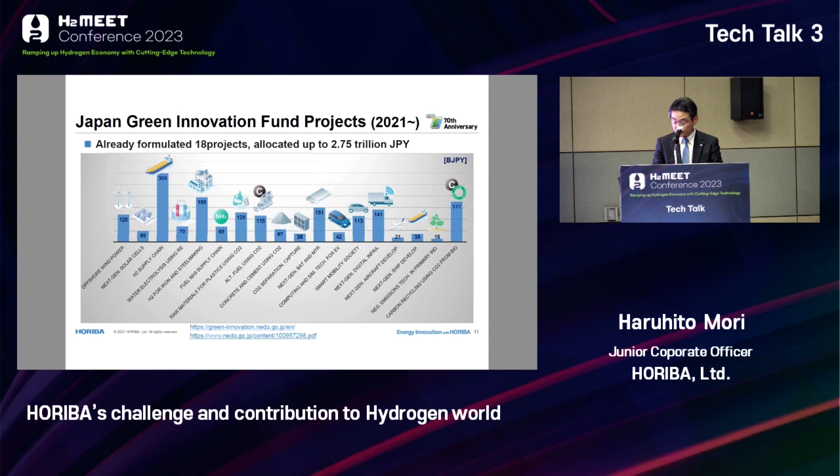Finally, I would like to summarize Japan's direction with regard to hydrogen. Until now, Japan has proceeded with the development of fuel cell technologies through FCEV, hydrogen refueling stations, and household fuel cell cogeneration systems we call ENE-FARM in Japan. Hydrogen has recently come into the spotlight as an energy carrier for maximizing the use of renewable energy. Japan has to import a lot of energy, including hydrogen utilized fuel.

The government has decided to update the strategy to not only develop the domestic market, but also expand Japanese technology into overseas markets in order to achieve carbon neutrality by 2050. In addition, this is a changing point from the previous strategy: Japan decided that the basic hydrogen strategy also covers ammonia, e-methane, and synthetic fuels, e-fuels, to promote carbon neutrality.

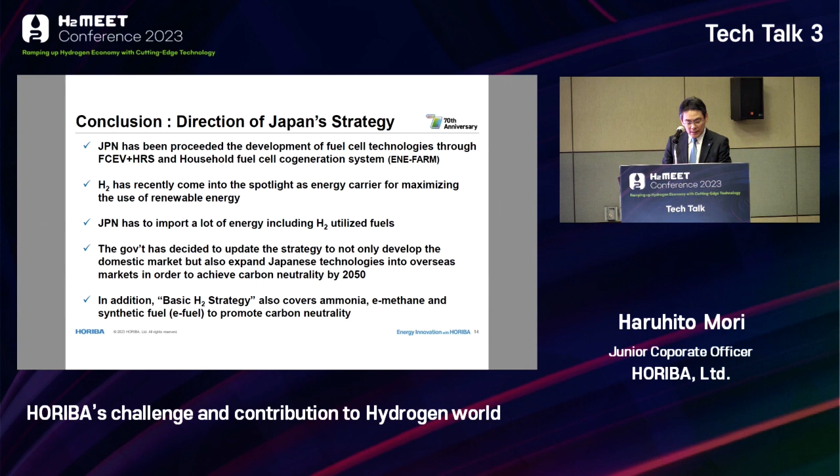Yeah, this is the conclusion of my presentation. Thank you very much for your kind attention.